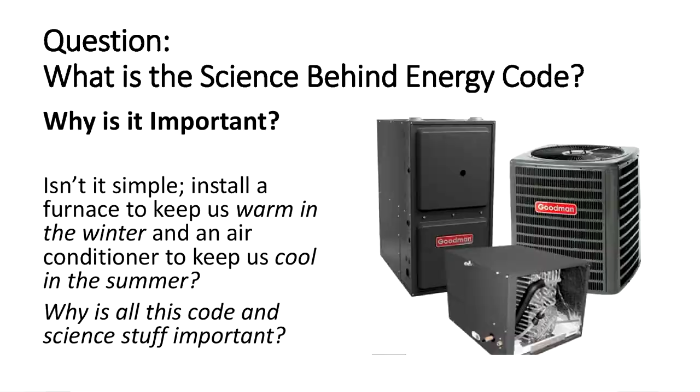Welcome to episode 1, the science behind the Energy Code. What is the science behind the Energy Code? Why is it important? Isn't it simple? Install a furnace to keep us warm in the winter and an air conditioner to keep us cool in the summer. Why is all this code and science stuff important?

Thanks, Katie. Appreciate the opportunity to be here. Why is all this science stuff important? Many of us do think that simply putting in a furnace and an air conditioner, maybe a big one so we're sure it's going to do the job, is all we need to do. But there is a lot of building science that we need to be considering if we want our buildings to be healthy, safe, durable, and a lot of other features, and of course, energy efficient.

So building science, our introduction. Building design, construction, and operation can affect occupants' health, occupant comfort, building energy consumption, building structural durability, and that's a big one.

We've heard lots of instances on the news lately where there have been lawsuits and litigation over water intrusion issues into our buildings, and so that's an important thing to consider.

The building envelope separates conditioned space from unconditioned space. So as we look at this home here, if we consider the garage typically is not conditioned, but the rest of the home is conditioned, any components that separate the conditioned from the unconditioned space is considered a component of the building thermal envelope.

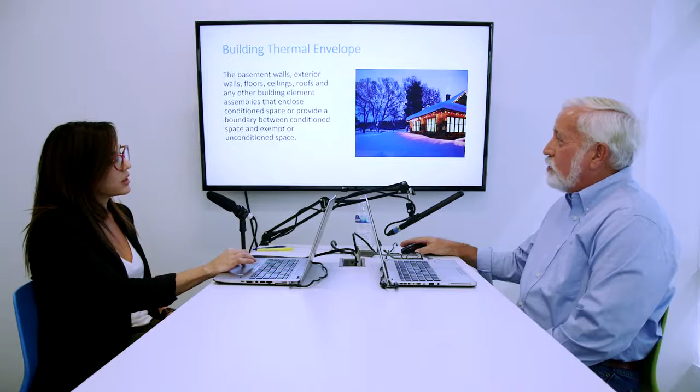The building thermal envelope, let me read this definition and then we'll talk a little bit about your question. The basement walls, exterior walls, floors, ceilings, roofs, and other building element assemblies that enclose conditioned space. So let's talk about that basement. In fact, let's read a little bit further. Or provide a boundary between conditioned space and an exempt or unconditioned space.

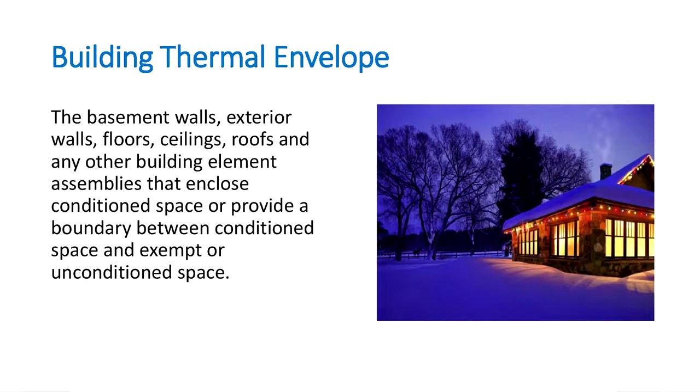So if we have a basement and we insulate the floor above the ceiling of the basement, or the floor of the main floor above, then we're creating an insulated boundary, and so the thermal envelope would be the space above the basement. However, if we insulate the basement walls, then we are creating the boundary down to the basement floor.

And so the basement can be conditioned or unconditioned depending on how we insulate that or where we create that building envelope. Same thing will go for other things like the bonus room over the garage.

The garage is not conditioned. The bonus room is over the garage. We have an insulated floor under the bonus room, or ceiling of the garage, and then all the walls around it. And that brings up a really good point.

That bonus room over the garage is exposed to unconditioned space virtually on all sides except for maybe a connecting hall coming from the rest of the house. So what's it going to be? It's either going to be colder or hotter because it's more exposed to the outdoor condition, where the rest of the house might have just one or two walls exposed and a ceiling.

So that boundary is the thing that we need to be thinking about. And that boundary is a really important thing as we look at the airflow and the moisture flow too, because it's really that separation between conditioned and unconditioned space.

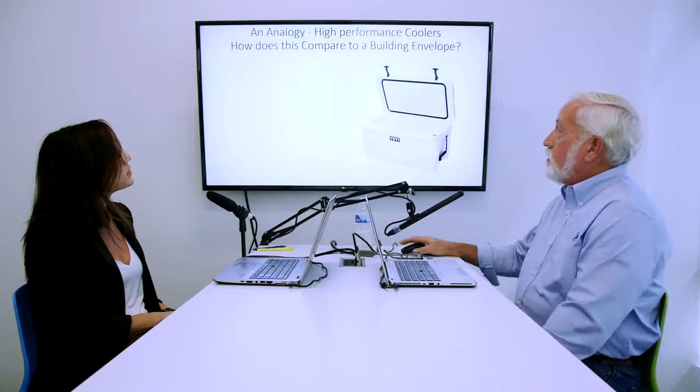So this is an analogy I like to use when we're talking about building energy efficiency. Most of you watching this, and Katie, I imagine you're familiar with these high efficiency coolers, these super expensive, super insulated coolers. They are not cheap.

My wife and I have spent quite a bit of time during this COVID thing taking the trailer up in the canyons above Kamas and doing some camping. About every 2 days, I have to go down and get some more ice because my cheap cooler melts all the ice away and I'm running out of ice. And I'm trying to build up the desire to buy one of these, and I probably will.

But these coolers keep food and drinks cold 5 times longer than standard cheap coolers. So my cooler that keeps stuff cold, keeps the heat out, will go 10 or 11 days rather than 2 days, simply by reducing the amount of heat transfer either into or out of the cooler.

So the cooler will also work if you put warm food in it. It'll keep it warm for a long time. And how does it do it? It does it by increased insulation.

So the walls of this cooler and the lid are better insulated. You'll see that there's a hard plastic shell all the way around, then it has spray foam injected in it. So it's really tightly well insulated with a high R value, much more than we see on my cheap little cooler. So we have less conduction, or we have less heat flow.

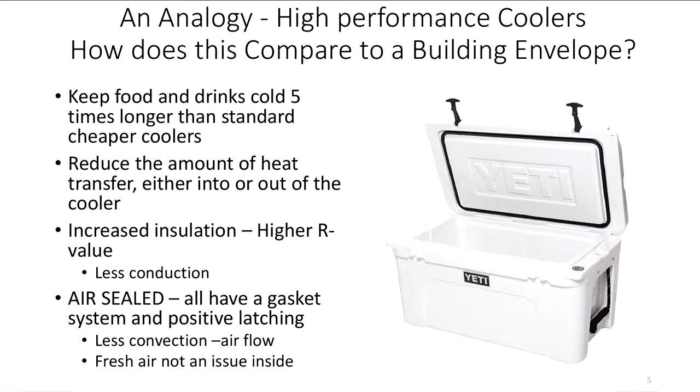The only time you get air in it is when you open the lid, and then you're going to get some warm air in, just like our home. If we have a well-insulated, well-sealed home, we don't get a lot of air transfer in and out unless we're opening a door or a window. And so by having it air sealed, we have less convection or airflow between inside and out.

Now, the problem with a cooler, we couldn't live very well in that type of thing because we wouldn't have any fresh air. So fresh air is not an issue on our Yeti cooler, but the concept of the insulation, the air sealing, we can take and directly apply to our homes and our buildings. So we could talk about, I want to build my structure like a Yeti cooler or a Pelican cooler or whatever brand. They all use the same type of technology, good insulation and air sealing.

So those are two real important factors that we have to consider when we're looking at the building science. And by doing that, we really have a cooler that saves a lot of energy. I'm not having to put so much ice into it.

Now, if I build that super insulated house, am I going to need a furnace? Am I going to need an air conditioner? I get that question quite a bit. If I super insulate my house, do I even need a furnace or air conditioner?

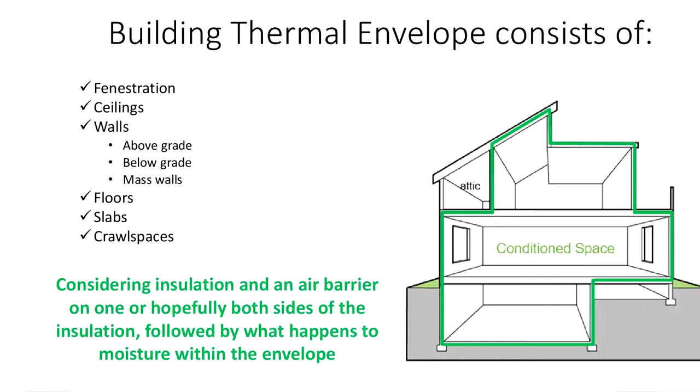So the thermal envelope consists of the following, let's go down through the list. Fenestration -- fenestration is our windows and our doors. It's any opening that we put in our building envelope. So that's what we call fenestration, that's how it's defined. Then our ceilings.

So if we look at this, here's a ceiling area in this house. This is a ceiling area. We have a ceiling area here, and a little ceiling area here. So this is the ceiling for this space, as it is for this space.

Then we look at our walls. We have several types of walls. We have our above grade walls -- so this one, this one, and this one, and this is actually considered a wall too. Here, our below grade walls, our basement walls, so they're below grade. A mass wall would be a concrete wall. We could kind of call our basement walls a mass wall, but if we use concrete all the way up, then we consider it a mass wall above grade.

Our floors -- we have two floors, three floors actually. We have this floor and this floor, but they're not part of a thermal boundary, right? But this floor over here is over an unconditioned space. And this floor is over the ground. Now it's not as cold as outside, but it's still a floor that's not inside the thermal envelope.

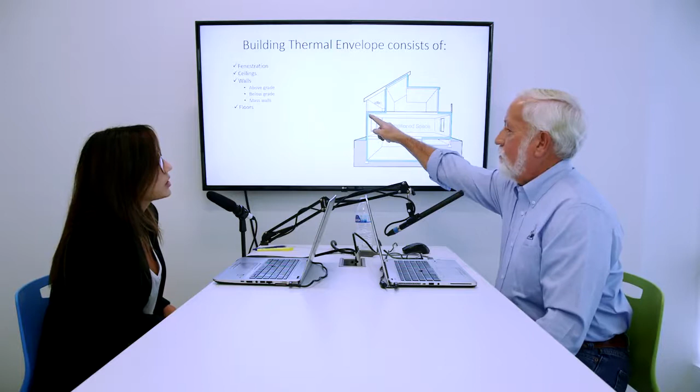Actually, I don't like the way that I have it described here. I would prefer that we insulate down here, which means this space is inside the thermal envelope. Why would you do it that way? Because every time we put in corners and such, we impact how we need to seal the insulation, and we're going to get into this a little bit deeper as we move on.

But insulation, the typical insulation we use in our homes is a fiberglass batt or a blown fiberglass material. So if we have fiberglass batt right here creating that thermal boundary, then we have to put a block in here and somehow seal that space. If we don't, then air has the ability to move back and forth, and if we move air through insulation, we lose our R-value.

Same thing, a big point on this one: we like to see insulation -- fiberglass insulation, or cellulose, anything that relies on air within the insulation for some of its value -- enclosed on all 6 sides. What I mean by all 6 sides is if we insulate this wall, it's going to be enclosed on the face of the drywall, enclosed by the bottom plate of the wall, and then there's another plate on top that'll enclose it, and the 2 studs on either side, so we enclose it there.

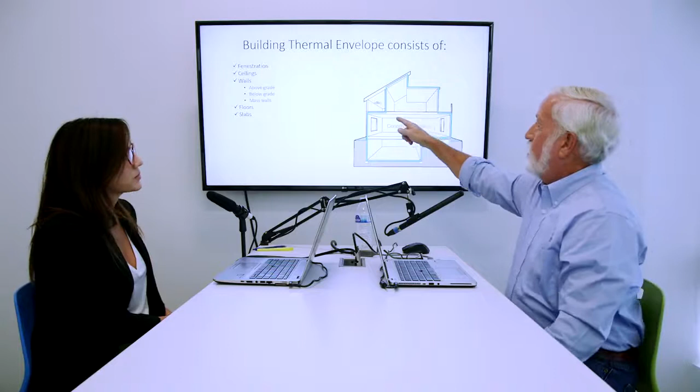So as air rises, what's going to happen? Other air has to come in. So we actually get a convective flow where air will flow up and around within the insulation that's in that wall cavity. And when it flows up and pulls in air from the attic, what is it? It's cold air. And so we destroy some of the R value of the insulation by having air convecting up and down through it.

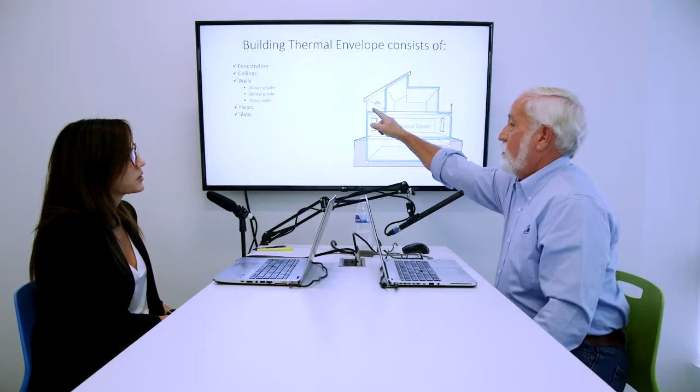So what the code wants us to do, and what building science tells us to do, is to put an air barrier or something on the back side of that knee wall so that we enclose the insulation on all 6 sides so we don't have any airflow. So if we insulate here and here, we would need to cover the insulation there. We need to cover the insulation there, but we eliminate this area here. This gives us, actually, you could put cabinet fronts here and use that for storage space and not create a void in that thermal envelope.

So you could put ductwork in there. The ductwork's not outside the envelope. You could do lots of things that make it a better application, and you don't have to do all this blocking and stuff in other places.

Now, when we get down to the crawl space, we can do the same thing. We can come down and put a good vapor barrier on the ground. The code's not going to worry about the ground because it's not cold. It's 55 degrees, like we said, but they'll require this to be insulated. The issue with crawl spaces, though, conditioned crawl spaces, is we have moisture coming up out of the ground. That makes sense, and that's an issue.

So you need a real good vapor barrier on the ground to stop the moisture coming up. Otherwise, you end up with that excess moisture in your house, and then we have lots of problems when we get excess mold and everything else. And I actually have a picture of mold from a crawl space. So we'll see that, and it's that very issue. So I'm not real excited about conditioned crawl spaces, but I am about conditioned attics if they're done correctly.

So let's just finish going down through our list there. We have the floors, our slab floor. We have our crawl space. Considering insulation and an air barrier on one or hopefully both sides of the insulation, followed by what happens to moisture within the envelope. So two things that we're looking at on this envelope that are big things: the insulation, the air barrier, and then the moisture. We just talked about what happens on the moisture here.

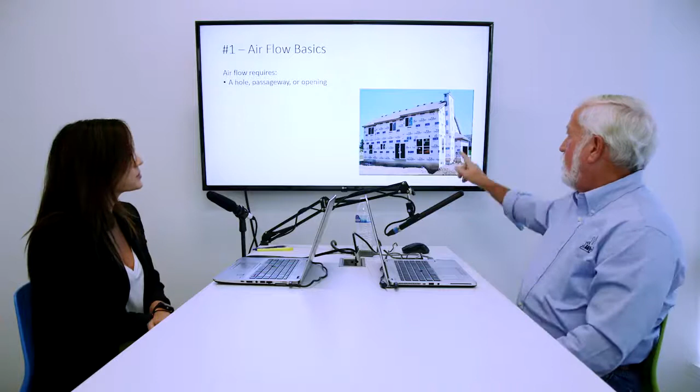As we look at this picture, this has building paper on it. It might not be easy to see, but in some places they've taped the seams, trying to make that air barrier really tight so that we don't have air leaking through there. They have a little spot they need to finish here, but pay attention to this little thing, because we're going to talk about it later—see this fireplace coming down? Yeah, it's opened kind of at the base, opened underneath. We're going to talk about those a little further on.

So by putting this paper on, what have they tried to do? They've tried to cover the holes rather than going around and sealing every little tiny hole, because you have minute holes between the seams in the plywood, cracks and joints. We're going to have holes where air can get through just because the framing members aren't perfectly tight to each other—there's air spaces. The building paper is a good method: you wrap it, seal it up with tape, and you've patched all those little holes behind there without having to individually seal those holes. Yeah, that would be very tedious.

So to have airflow again through there, we have to have a hole. Then the second thing, we have to have a force to push the air or pull the air through that hole. If we have no breeze, if we have nothing else that creates a pressure difference, then really we don't have airflow, because you have to have a pressure difference before you have airflow. But we'll find that it's really easy to create a pressure difference, and we'll see that as we move on a little further.

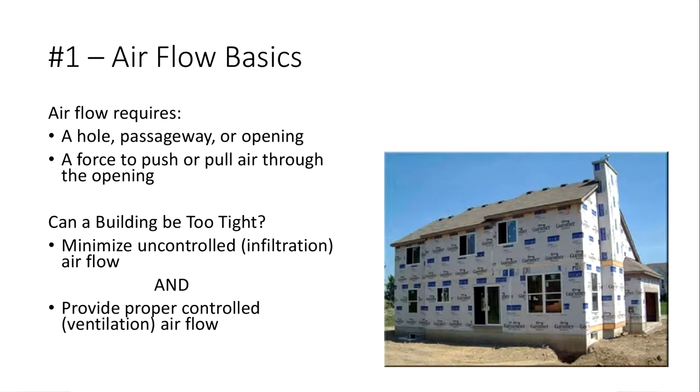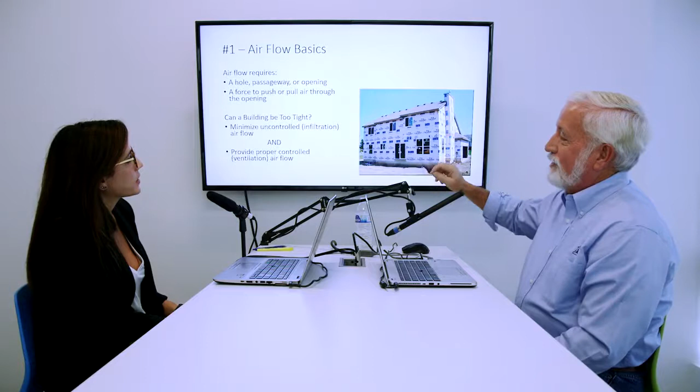So we're going to talk quite a bit more about these two terms. Infiltration is the uncontrolled movement of air through the envelope. Ventilation is the controlled movement of air into the building. So we don't want infiltration and we want ventilation. That's exactly right. And why is that? Because we can control it.

Now, what happens with infiltration? We talked this morning about the windstorms we had a couple weeks ago. When you have a building that leaks a little bit, when you double, triple, quadruple, or even increase the wind ten times what normal wind is, you increase the infiltration by the same factors. So the wind will just blow right through houses. Fortunately it wasn't really cold, but I imagine some people's houses got hot because during the warm days, so much warm air was coming in that the air conditioner probably struggled keeping up. That's true, so wind is a big factor. We're not going to talk about blower door testing today, but we blower door test buildings to see if they're airtight—what we're doing is simulating having wind on all sides of the building.

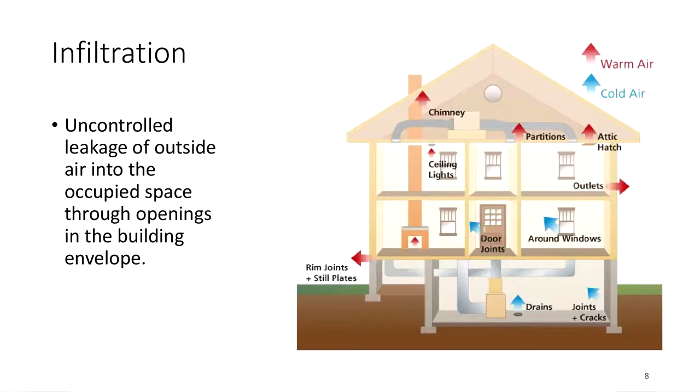So infiltration, let's talk about this for a couple of these slides. It's the uncontrolled leakage of outside air into the occupied space through openings in the building envelope. We'll just call them holes in the building envelope. And this shows a few of them.

We have electrical outlets. I don't know if you've ever experienced it in the wintertime when the wind's blowing, you can go over to plug something in and you actually feel cold air coming through your electrical outlet. I've definitely felt a draft from windows because we have old houses on the East Coast and windows get very drafty. And they like to preserve the old windows because they're historic, and they do get drafty.

And in fact, some of the drafts you get off old windows isn't even air leaking through them. We'll talk about that further, because if you have a big window that gets really cold outside and it's single glass, what's going to happen to the air touching the window on the inside? It's going to get cold, so it's going to fall. And so that convective flow we talked about with insulation, we get the same type of convective flow against a poor window because the cold air drops, and as it drops it pulls air from above down through it, and you get this flow against the window.

And if you're sitting there, what are you going to feel? You're going to feel very uncomfortable because you got a cold draft. And the window could be perfectly caulked and sealed, and you're still going to have that drafty feeling. It's because we got air movement created by temperature difference, not air leaking through the envelope. But both of them are uncomfortable.

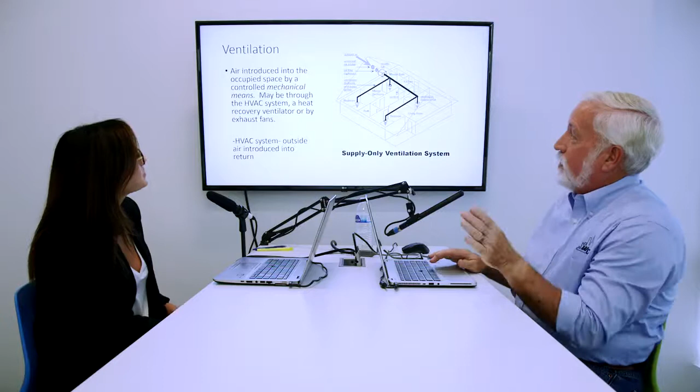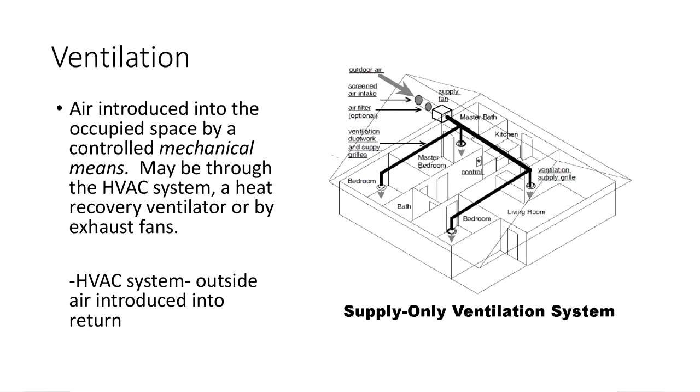So we've talked about infiltration, and now ventilation is when we introduce some air into the occupied space by mechanical means. That means we have some type of fan that brings outside air in, or we can do it with exhaust fans, or with heat recovery ventilators. There's a number of methods. This one is what we call a supply-only ventilation system, where we bring in some outside air through a fan. We filter it and screen it so bugs and rodents don't get in, and then discharge a little fresh air into the rest of the building.

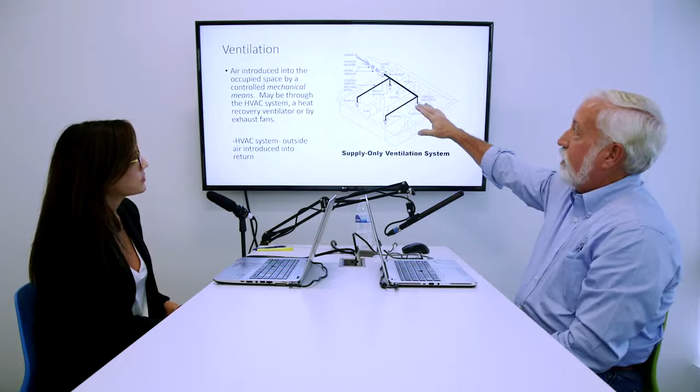This can actually be done by hooking into your HVAC system, so when that runs, we pull a little bit of outside air. When we have a supply-only system like that, how do we exhaust air out of the building? What happens is we pressurize the building by bringing outside air in, and so however much we pull in leaks back out through all the holes we talked about.

This is just one of the ways that we can ventilate. We're not going to spend a lot of time on different types of ventilation systems, but there are 4 or 5 options with some hybrid mixes of those together. That'll probably be another topic we discuss sometime. But let's just remember that ventilation means we're controlling how much outside air we bring in.

So are you saying infiltration is bad and ventilation is good? Isn't energy consumed to offset infiltration air the same as for ventilation air?

Great question, and I've had this discussion and some arguments with people over it. Why am I making a house tight if I have to bring in some outside air? Why don't I just let it leak so we get fresh air that way? The question really is, we can control how much ventilation air we bring in, but we can't control the infiltration. The infiltration will change depending on the wind, depending on the temperature outside and inside. It changes—there are just a lot of factors that impact it.

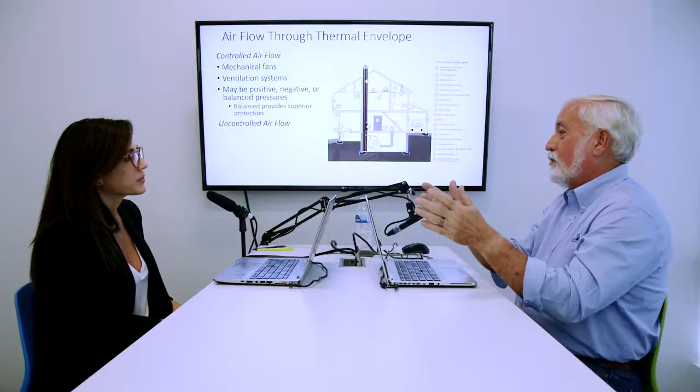And then we have neutral pressures, and we're not pushing moisture into walls or sucking moisture from outside into our walls. We're trying to minimize or eliminate that moisture into our wall cavities. Balance provides superior protection by far.

And then we have our uncontrolled airflow, repeating some of these things a bit. Those are things that are not part of the building design. We don't design a building and say, I want to have 4 square feet of holes in the space so that we make sure we leak plenty. We don't plan on uncontrolled holes in the building.

And that's what they are. They're leaks or holes in the buildings, or leaks in the HVAC ducts. If we created our thermal envelope and had duct systems leaking, it's leaking outside the thermal envelope, so it could either exhaust air out of the space or suck in outside or unconditioned air into the space. So we can positive or negative pressure the house through leaky duct systems.

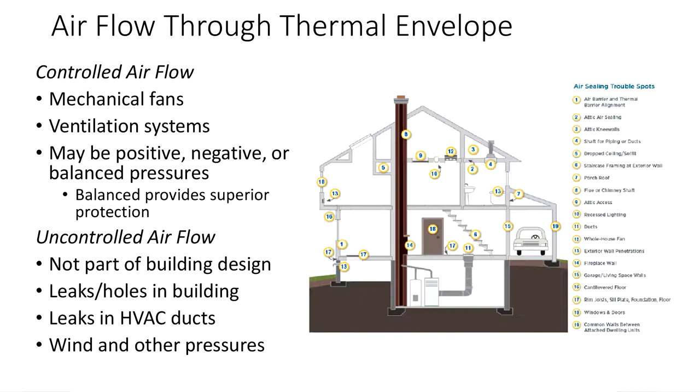And then winds and other pressures that we'll discuss a little bit. Are some of these leakage spots more cause for concern than others? What would be the main focus?

There are some that really are a concern. And the first one I want to point out, number 15, is the wall between the garage and the living space.

Now, I don't know if you've heard this on the news, but I pay attention to these types of things. With one of the hurricanes we had a month or two ago, I can't remember which one it was, but they said they had about 80 deaths, and about half of the deaths were from improper operation of generators. They had no power, so people were running generators. And people lots of times will put a generator in a garage so they don't have to hear it, and so it doesn't get stolen or whatever. Yeah. And of course, you don't want it in the house, because it'll kill you if it's in the house.

If the generator is in the garage and we have a leaky wall between the garage and the house, we can get carbon monoxide off the generator into the house. People have died running generators in their garages. The same thing happens with charcoal grills in the wintertime, people bring them into the garage and open the door a little, but carbon monoxide levels build up. If the house is negative pressure, whether from a fan running or stack effect, and it's not sealed, we draw those products of combustion, the carbon monoxide, into the house. Families have died from charcoal grills and generators in garages, so that's a big one.

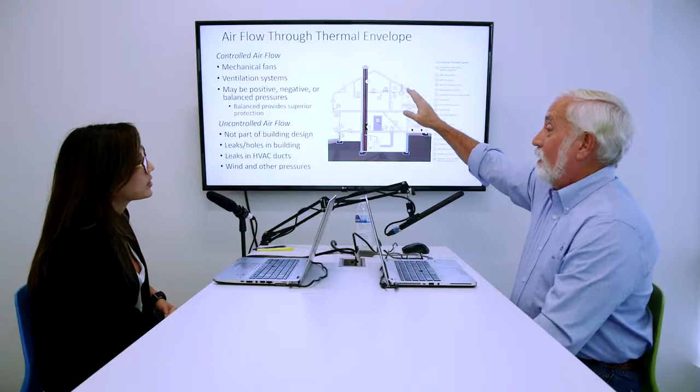Another important one is fireplaces, a big hole right through our house. I've been on thousands of roofs in my career, and if you walk over to a masonry chimney and lean over the fireplace, you can feel air drafting out of it. People don't realize there's a damper in there, but it doesn't close tight, or they don't close it when not in use. So warm air from the house is always drafting up that chimney to the outside, which takes the house negative, which means it could draw air from someplace else, exhausting air from inside the house without any mechanical means. It's just warm air rising, and that's a big one.

And then we have concerns with gas appliances if those aren't properly vented. They can vent into that chimney or vent through another vent. So those are three big ones you need to worry about: the chimneys, the fireplaces, the vents off the furnaces, and the walls between garages and the house.

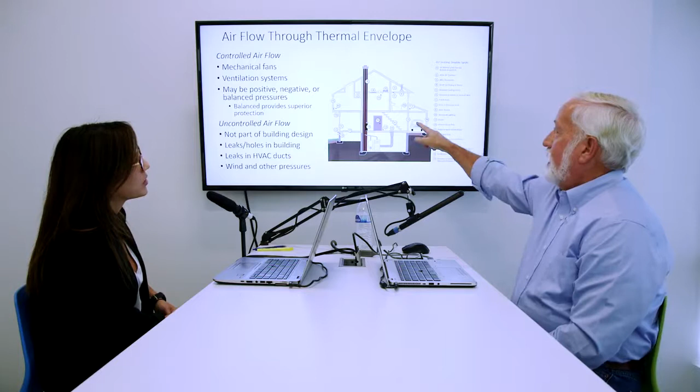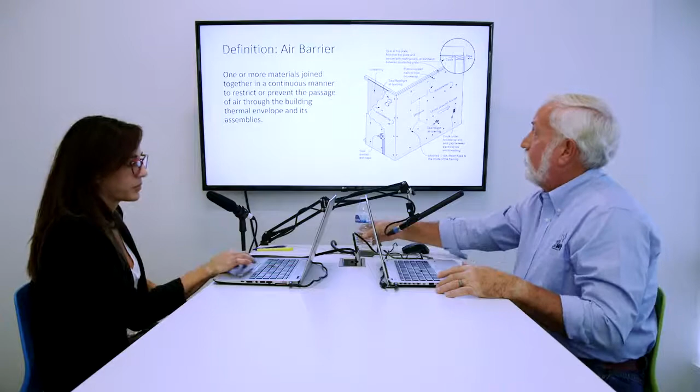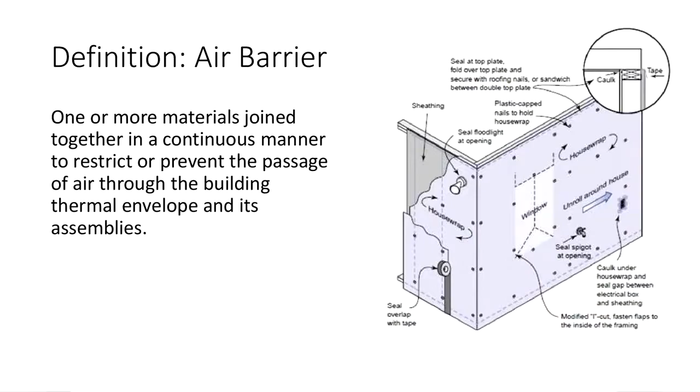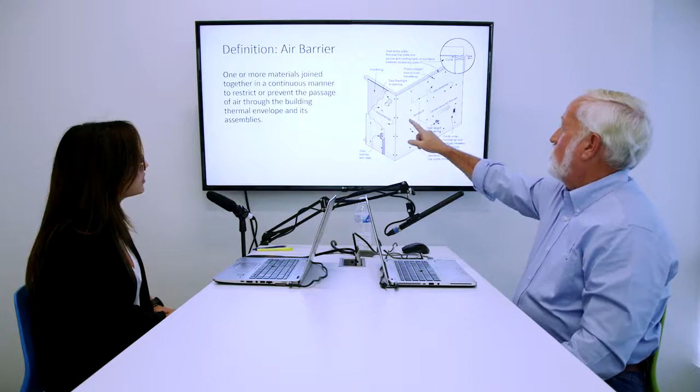So let's define air barriers or building papers. It's a material that we join together in a continuous manner, and we can see it on this graphic. They nail and staple it, cover everything, and then tape the seams and seal around the penetrations. You've got a hose bib coming out, an electrical box, a floodlight. You make sure you seal all those things and tape them, and that's how we seal that thermal envelope.

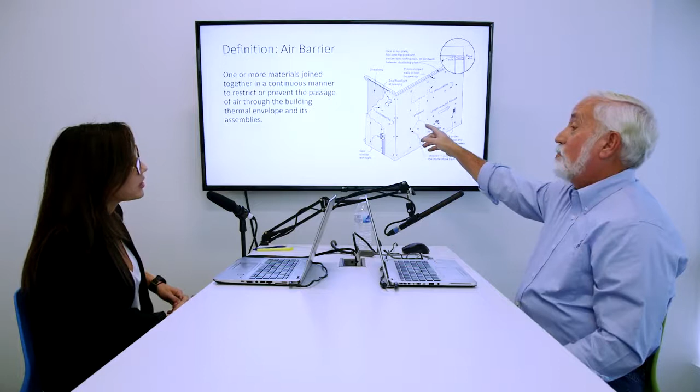Does the air barrier stop rainwater? That's a good question, because sometimes we call it house wrap, and it does stop rainwater. Any rainwater that gets through will run down it. But it is not a vapor barrier, so plastic sheeting is not something we'd want to put there. People say, isn't plastic sheeting a really good air barrier? Won't it stop any air from coming through? Sure, it'll stop the air.

But what does plastic also do? It stops vapor from being able to move through it. So these papers stop the rainwater, they shed it, and it just runs down. It's kind of like a rain jacket, not a rubberized one, more like a windbreaker type rain jacket, or like Gore-Tex. It sheds the rain, but if you sweat, it breathes enough that the moisture can dry away from your body, and that's the type of material we want.

Because if we put a vapor barrier on the outside in our cold climate zone, and moisture coming from inside strikes that vapor barrier, it's going to see cold plastic, and what happens? It condenses. You'd have moisture on the backside, and moisture will destroy your building. We get into the mold issue again. So our air barriers need to have a perm rating so that any moisture on the inside has the ability to move through, giving us the ability to do some drying.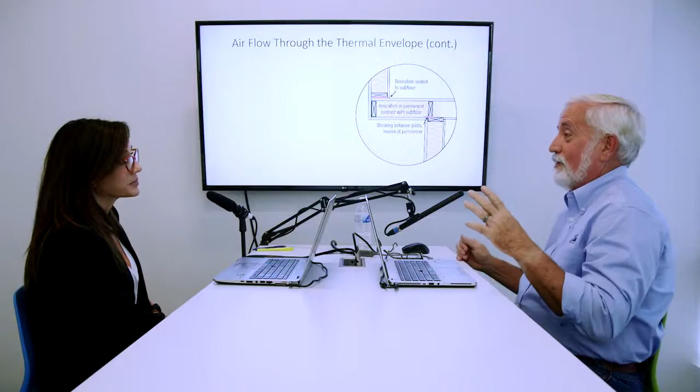Back 40-something years ago, when I first started doing HVAC, we built pretty simple houses. They were little squares or rectangular shapes. What do we see now? You go by townhouse projects or apartments or new houses, and what do they have? They have a bay sticking out here and a cantilever here, lots of angles and everything. They're not plain and straight. We have lots of this type of stuff occurring, kind of like that first picture we showed where the insulation goes up around that little attic space.

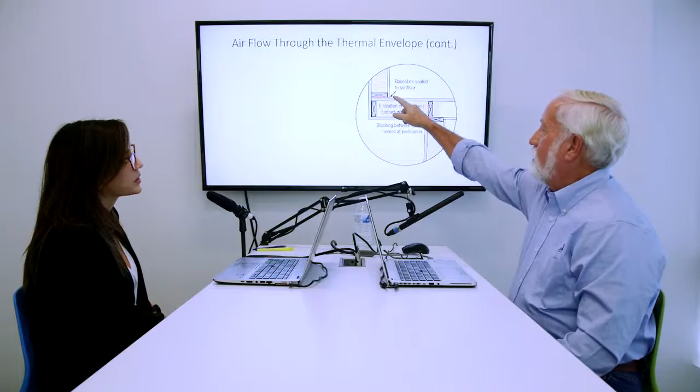Every time we make any of these turns and stuff, we have areas that we might need to seal. So sealing the thermal envelope, if we're not putting that building paper on, or we're not comfortable that it's going to seal it properly, we have lots of other places we need to seal. And it's not really expensive on some of these, because before we put the wall on, we can put something down for a sealer. When we put this block in, we can seal the block when we put it in. So some of it's just a process change. A framer who understands these principles can do a great job eliminating air leakage just by changing his habits or practices a little bit.

So many little holes equal a large single hole. I don't know if you've ever seen him, but we've had him come into Utah a number of times, Mark LaLiberte and some of the other gentlemen from Construction Instruction. They come in and give really great talks on building science and how we can build a home that's tight.

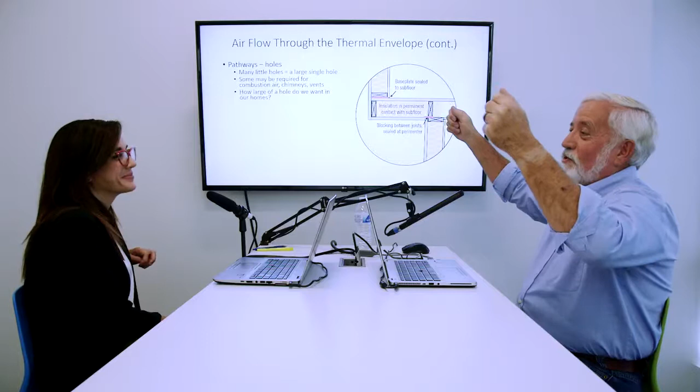I love what Mark does in every class. He takes a big piece of paper off the easel where he's writing things, folds it in half, and says, do you want a hole this big in your house? No one wants a hole that big in their house, leaking air through it. Then he talks about how all those little holes in your house add up to a hole this big, and we can verify that through blower door testing. If we do the proper air sealing, the better we seal, the tighter we go, he folds the paper up and says, well, maybe you only want a hole this big. Theoretically, we don't want a hole at all. We don't want any holes.

Now, to not have any holes is literally going to take cooler-type construction, and it's really going to be expensive and hard to do. But there's some technologies out there - insulated concrete forms, ICFs, the big foam blocks that look like Legos. You stack them all up, then pour them full of concrete. They don't leak air at all. Foam and concrete this thick isn't going to leak any air. The only place you're going to leak is around your windows, doors, and ceiling. So they make really tight houses that you have to ventilate.

So that's a great question - how large a hole do we really want in our house? How large a hole do we want to have that we have to pay extra money to heat and cool our house because we basically have an open window all the time? Now, some holes may be required for combustion air, chimneys, and vents, but we can actually get around those if we want to do the right things. We'll talk a little bit more about that.

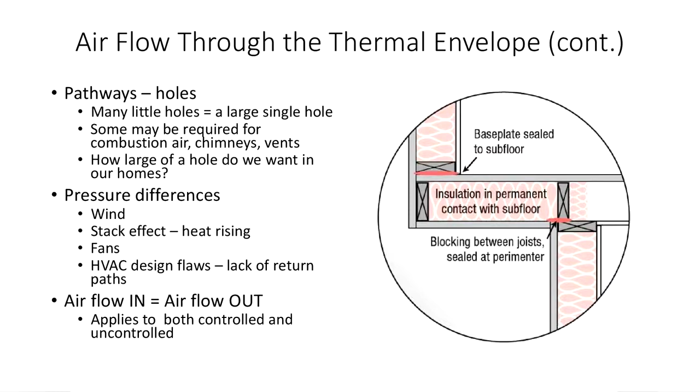Just want to reiterate this one: if we leak some air out, if we exhaust some air out of the building, we're going to have air come in to replace it. If we have air come in from outside, whether it's through the wind or a positive pressure fan that sucks air from outside and dumps it into the space, we're going to have to leak a certain amount out. We don't create air inside the space - it's always going to strive for a balance. Air in equals air out, and it applies to both controlled and uncontrolled, whether it's infiltration or ventilation. If you bring a certain amount in, it has to leak out. Now, when we get into big buildings, large commercial buildings, they're bringing in so much outside air to maintain air quality in the whole building, like a building we're in right now.

And so they are pulling it in with their HVAC system, and then they have big power exhaust fans that remove it, because we can't rely on it leaking out of the building since we have so much interior space that doesn't see an outside wall. Yeah, it'd be stale and stagnant in the middle part of the building.

So we have to mechanically make sure we have that controlled ventilation done according to engineering principles. Okay, the next one, let's talk a little bit about building too tight and vapor barriers.

I remember it real well because you have events that happen in your life, whether it's work or someplace else, where something crazy happens, and you remember that event. Back in the 70s, 76, 77, when we were talking about the energy crisis, one of the things that came out of there was we need to build a tighter building.

Someone came up with the idea that we normally put VisQueen vapor barrier on the warm inside surface of a wall here in Utah. If this was an outside wall, we'd put a vapor barrier behind the sheetrock so we don't get the vapor, the moisture, into the wall cavity. If done correctly, they work well.

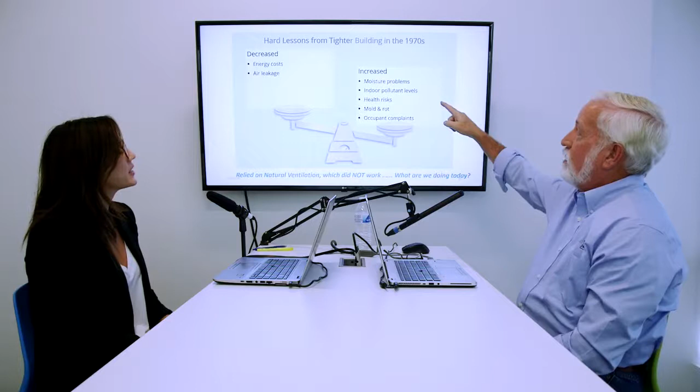And so that was short-lived—no more vapor barriers on the ceilings. Those were some of the hard lessons they learned. It did decrease energy cost and decrease air leakage, but it drastically increased moisture problems and indoor pollution levels. We have health risks, mold, rot, and occupant complaints. So it did not work.

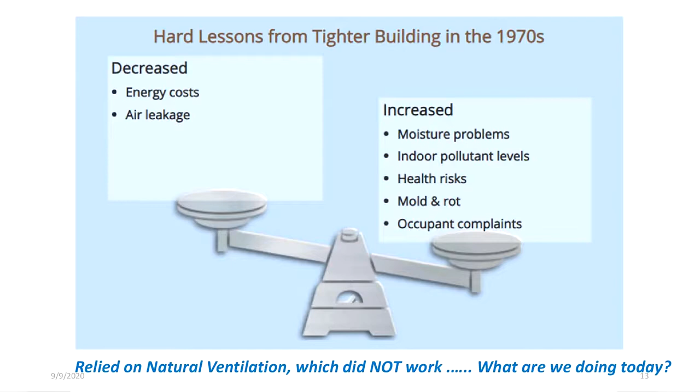And the big problem was, if we look at the bottom, they relied on natural ventilation, which did not work, and which doesn't work today either. Now the question is, what's natural ventilation? Natural ventilation is we crack the windows, we crack a door.

It's not going to work very well. People don't want to open their windows in the summer, and they don't want to open them in the winter either, especially with the fires going on and the smoke we'd bring in from outside. Our code still allows natural ventilation, and we're still doing it today in some cases, but it really needs to disappear from the code because natural ventilation doesn't fit with the other things we're doing to the building envelope. We really need mechanical ventilation.

Yeah, it seems quite counterintuitive. Well...

I'm not pointing fingers, but we have amendments to our state energy code. If we didn't have those amendments, the way the code is written, every residential home or apartment up to 3 stories would be blower door tested, and every test would have to reach a level of 3 air changes at 50 pascals or lower. This is amended out, so you don't have to do it, you can. But if we followed the code exactly, we'd test everything to a level of 3 or lower, and there's a trigger that says if you're tighter than 5 air changes, you have to mechanically ventilate - you cannot use natural ventilation.

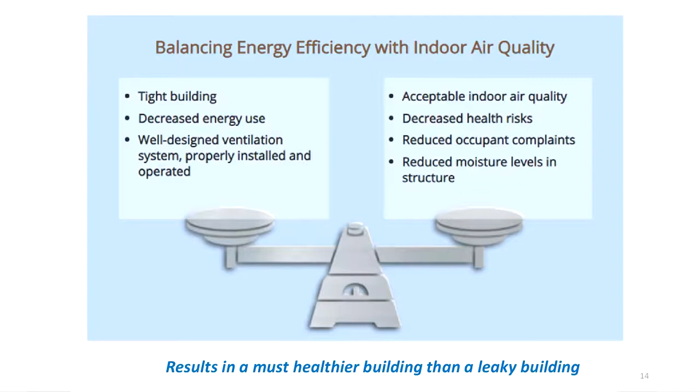A balancing of energy efficiency with indoor air quality is what we want to strive for. We want to build a tight building - and I'll repeat, I don't think you can build a building too tight if you do the right things, with a well-designed ventilation system so we can provide acceptable indoor air quality, reduce occupant complaints, and reduce moisture levels. So we can build a tight building, drastically decrease energy use, provide a well-designed ventilation system that's properly installed, balanced, and operated, and the result is a much healthier building than a leaky building.

Going back to that question, why don't we just have a leaky building? Well, we're still not going to ventilate the whole entire building. We might just ventilate around the perimeter, but we're not going to get fresh air out of the center of the building, or to the center of the building.

So, improper airflow - what are the effects on occupants? We've talked about some of these already: pollutants, mold growth, radon, smoke, CO2, VOCs, cleaning chemicals.

Moisture and mold because of poor humidity control, condensation. It's really a simple thing when we talk about condensation. Why do we get dew on the lawn in the summertime? Because we hit the right temperature that drops the moisture out. When I got this out of the fridge, what do we get on it? A little bit of moisture. If you come from the East Coast, you know that if you set a drink with ice in it down, it sweats and pours water. So depending on humidity and temperature, we get condensation - what we call the dew point. It varies depending on how much moisture is present and what the temperature is. We can get condensation at different times of the year, even in summertime, in our air conditioning ducts and things like that.

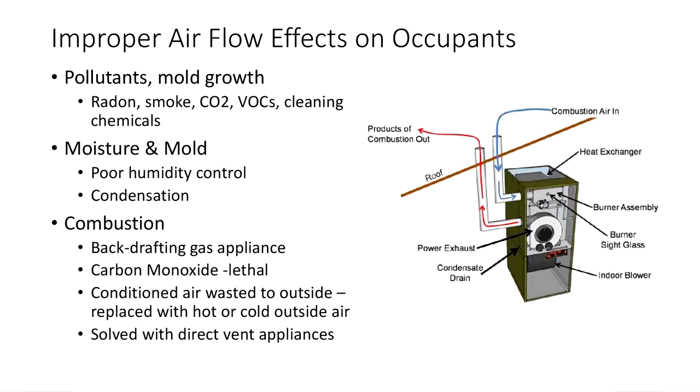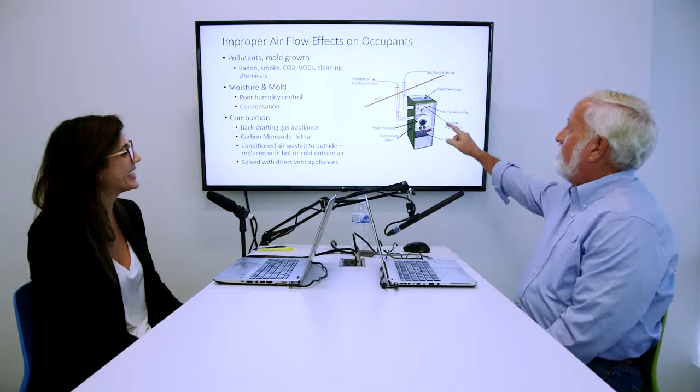Sure. I threw in this slide because I get this question a lot. This is a direct vent furnace. If we look at this furnace, here's our blower compartment. When this is installed, we bring return in the side or the bottom, and we have our supply going out. We have this heat exchanger in here, and you'll notice the burners are inside this little box, labeled burner sight glass.

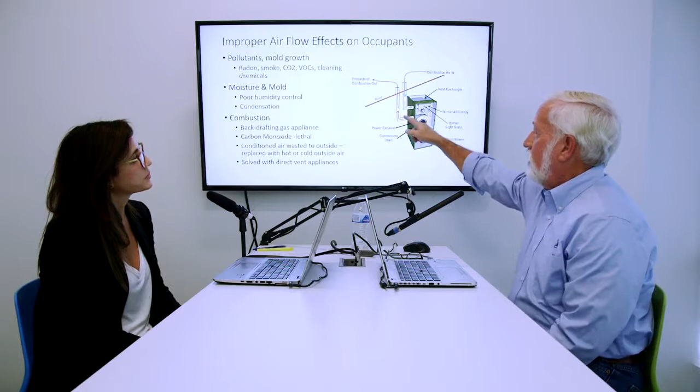And then we have a fan that actually pulls the products of combustion. The flame is pulled into this heat exchanger. The airflow across it pulls the heat off, uses it to heat the space, and then this fan exhausts outside. So this is what we call a direct vent appliance. It brings combustion air directly from outside in a sealed pipe into the burner compartment, goes through the furnace, and then back outside. Nowhere does the flame in this furnace see the indoor environment.

Now, a non-direct vent furnace will use open combustion. You won't have a burner enclosed in a little sealed box. Typically down in here you have burners, and you can actually see them. You pull the door off, and you can literally see the flame right there. And it's drawing air from inside the space. It rolls up through the furnace, and then exhausts out a metal pipe that goes up through a chimney or a vent. It relies on the heat in the products of combustion to carry it out, just like a fireplace. So that is a non-direct vent appliance.

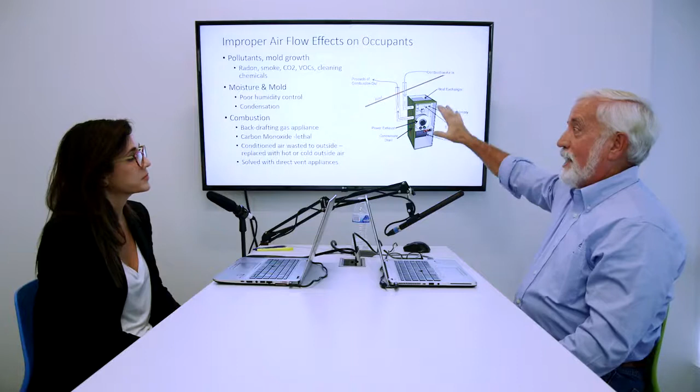Water heaters are the same way. I don't know if you've paid attention to a water heater, but they have a little cone on top with a vent pipe coming off of it. That cone draws air from inside your space, the burner draws air from inside your space. So if something were to go wrong, or if the building were to go really heavily negative pressure because someone messed something up, you can actually draw products of combustion into your space.

And when that happens, people get sick and people die. We hear about carbon monoxide deaths every so often, and a lot of times they're tied with vent systems. So a direct vent appliance is the way to go. It eliminates drawing air out of the space for the combustion process, and it eliminates the risk of exhaust fans reversing the vent and drawing in the products of combustion. So it solves a lot of issues, and it's really the best way to go.

They've been out since the early '80s, so they're pretty good appliances, and there's no reason not to put one in other than they cost a little bit more. But they do offset some of the things we have to worry about, the improper effects of that airflow through the envelope on the occupants. So I just threw this one in so we understand a little bit better.

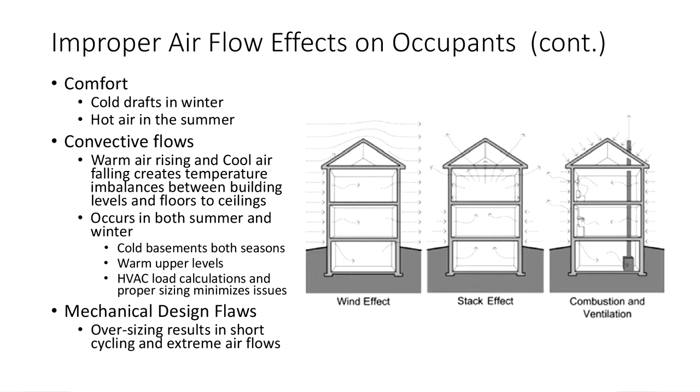So what does this improper airflow do? We've talked about these already. With wind, we see what happens: we blow against one side of the building and some air is going to leak in, right? So what's going to happen? It's going to push air out the other side.

Or there's stack effect, because we're warming this air, it tends to rise between levels. If you take a magnehelic, a low pressure gauge, you can actually measure the pressure difference between the lower level and the upper level. This will be positive pressure and this will be negative pressure. So it draws air in from the lower levels of the building. It's not going to draw too much through the dirt, but it'll draw right at this level. And then by the time you get up to the upper level, we're all positive pressure, and we're leaking out. That's the stack effect, the same thing that makes a chimney work.

And then we have combustion and ventilation. So we can have fans and dryers, range hoods, and all those things that suck air or exhaust air out of our space. A gas appliance that's burning and sucking air out of space because it needs air to burn, right? It needs oxygen to burn. And then that goes up.

Back in the 80s, and I keep going back because I experienced all these things, the gas company came around and the building inspectors said, do you know what, we're burning air out of the space. We call it combustion air that's used for heat production in the furnace.

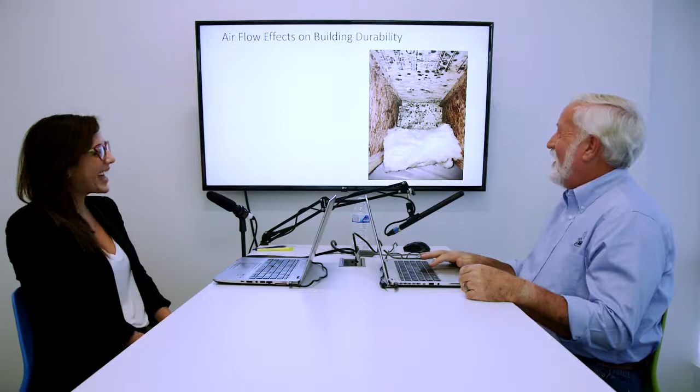Oh, here's my mold picture. Here's your mold picture. Isn't that great? That's actually kind of gross, isn't it? It is nasty. When I went out to investigate this, I got a call from a guy.

He says, can you come take a look at this and tell me what's happening here? I got up there, and this is the insulation that lays up against the rim joist, on the outside of the building of a home. And I pulled this insulation down, and I went, ooh, where's my mask? You know what I mean? Because see it out here?

It's spread, it's everywhere. There was so much moisture, but why was there so much over here? Because it's colder there. That's outside on the other side, so that's colder, and that's why we had so much more moisture there.

And it just goes right back to the thing we were just talking about. If we have, for some reason, airflows that are moving that moist air that direction, then we greatly increase the amount and the likelihood of mold growth.

So airflow can transport moisture into ceilings, walls, and other framing cavities. Moist air contacting a cold surface may create condensation. Just depends on the conditions. Obviously, the conditions were right here. And how did this get fixed?

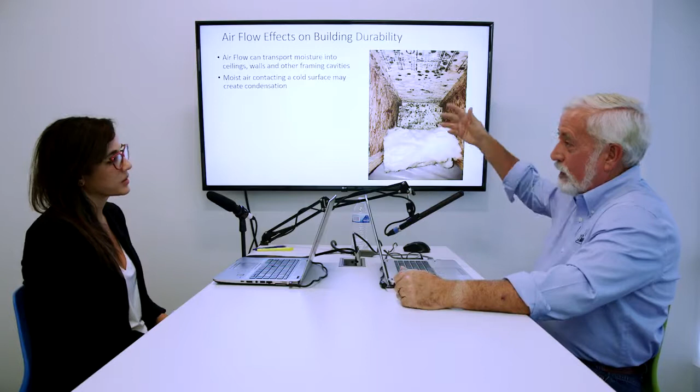So what he had to do was come in and put a whole new vapor barrier. They ran it up the wall, glued and sealed it to the wall, and insulated the wall real good. They had to bring a guy in, and they used dry ice to kill the mold, sandblasting it with dry ice particles, because after it's blasted, it just disappears since it's just carbon dioxide. And so they blasted it all.

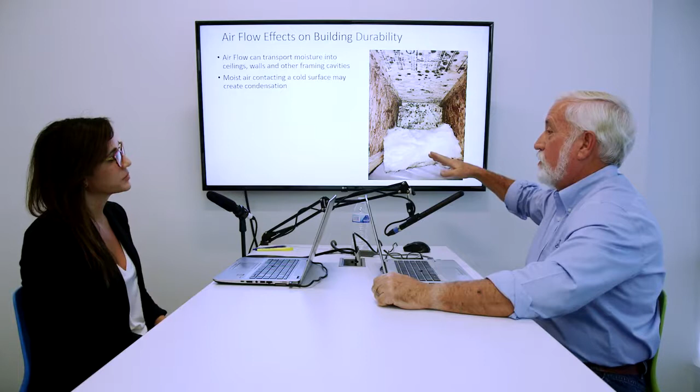And then I told him, what you need to do is spray foam on the rim joists. Because even if you have it all cleaned up and you put a piece of fiberglass back up and get a little bit of moisture in there, what's the moisture going to do? It's going to migrate through the fiberglass insulation, because fiberglass doesn't stop moisture. So one of the things on the checklist in the code says you have to have an air barrier on your insulation in the rim joists. And a lot of people don't do it, and this is the problem that happens.

So spray closed cell foam, a couple inches of that. What does it do? You put that spray foam on, outside surface here, inside surface here, the moisture hits the inside surface, but it's warm, because we have all this insulation stopping the heat flow to outside. This surface is cold. With the insulation up there, we still have air movement through it because we don't have an air barrier. It's not enclosed on all six sides, so the moisture still gets through, and we're going to have mold.

So hopefully he sprayed foam. I didn't see it after, but that's the direction I gave him. Or he'll be doing it again, because it's almost impossible to have that perfect seal on that vapor barrier on the ground—someone crawls across it and pokes a hole in it, and then the moisture's coming through. So it's building science, and it's something we've learned through mistakes.

It's surprising too, because Utah's so dry, to see a mold issue in a Utah home. But like you said, that's such a great point. I go to code hearings where the codes are developed, and I've been on some ACCA committees where we talk about load calculations, duct designs, and everything. Everybody keeps telling me, you don't have moisture issues. And no, we don't have moisture issues like those people do.

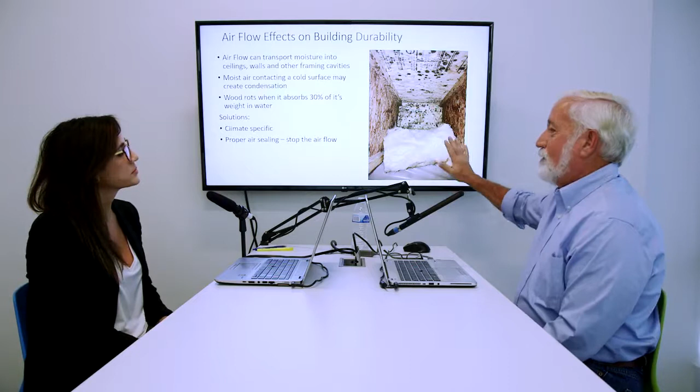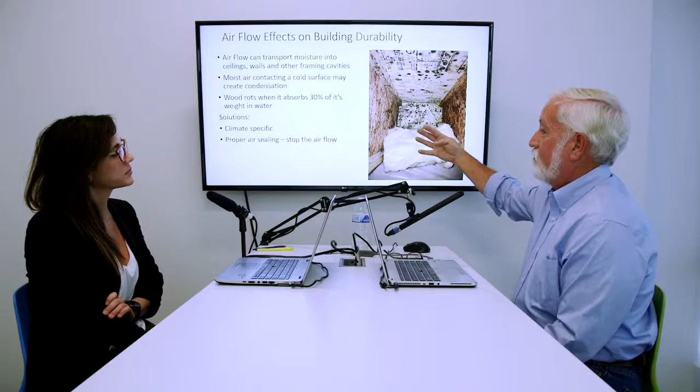This insulation looks like it's bigger than it really is. This is just a piece of insulation. If you stood it up, it's this depth, so it's just against there. But it isn't air sealed. It's got that side, this side, nothing on the bottom, and nothing on the face. So it only has 4 of the 6 sides sealed.

What's going to happen is air is going to come up through or drop down through, because it's against that cold surface. It'll drop down through the crawl space and just circulate around, and we get moisture due to the convective flow through the insulation. The insulation is almost useless at that point, and we even have colder temperatures because the insulation's wet.

Mechanical ventilation is one of the things we have to do, and we have to do it correctly. Insulate to minimize cold surfaces, and then add CI. CI stands for continuous insulation.

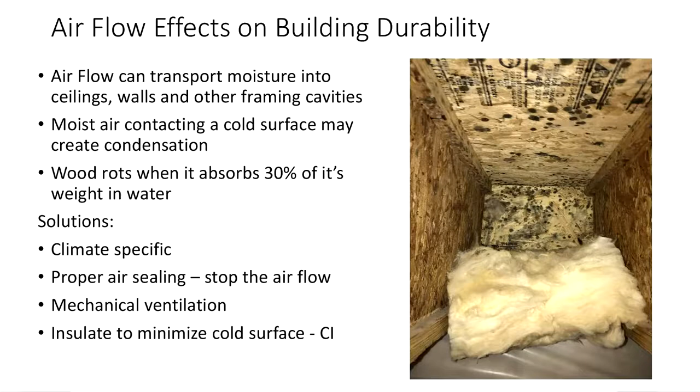This could have been solved if they had put continuous foam board on the outside of the building. Now it's a little more expensive, but you might have seen buildings where they put pink or blue foam or white foam on the whole exterior and then put the stucco over it. That gives you some continuous insulation.

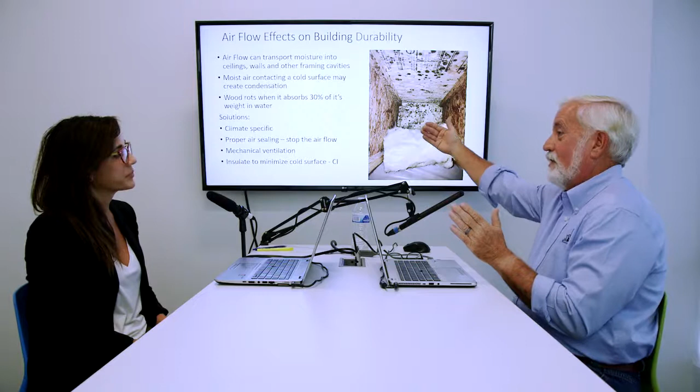And if it was on the outside, on the other side of that board, what does it do? It keeps this surface warmer, and then it doesn't condense, because we've insulated it. So it's similar to spraying the foam, but even better because it's on the outside and it's continuous insulation.

I think this is a great slide, one of my favorites, because it really tells the story. We can have fleece or a sweater or a sweatshirt, and it keeps us warm until we have a little breeze. And then what are we? We're cold.

And all we have to do is just throw a windbreaker on, an air barrier, and how much warmer are we? A lot warmer. Solves a lot of problems.

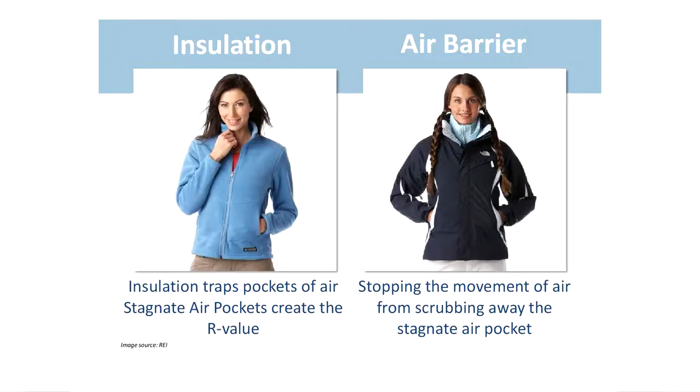It's the exact same thing with our insulation. If we don't have the air barrier, the air just moves through the insulation. Like a down jacket - if it doesn't have Gore-Tex or something on it, it's not going to do anything. The insulation traps pockets of air, and those stagnant air pockets create an R value. But as soon as we have air moving through it, we lose the R value, and it doesn't work anymore as insulation.

So if we stop that movement of scrubbing away those air pockets, it works. That's why we say all the time, put on your layers - we create those air spaces, and then put on your last layer, something that will break the wind.

Not only does it keep you dry and shed the water, but it also stops the wind moving through. You keep warm, but it breathes enough to keep you comfortable. It's not like the throwaway rain jacket you put on and instantly you're sweating, like ponchos, or the gloves that you put on - the latex or sealed gloves - and when you take them off, your hand is just soaking wet.

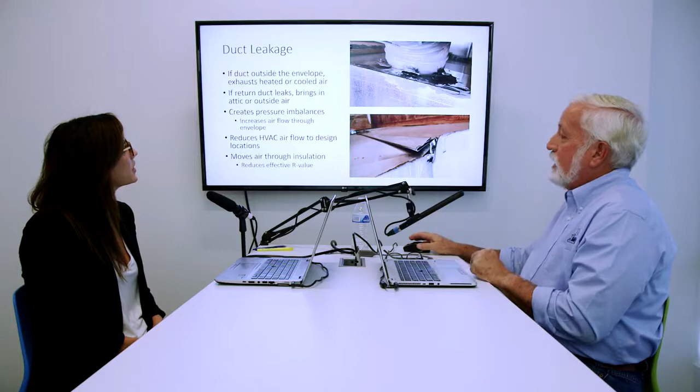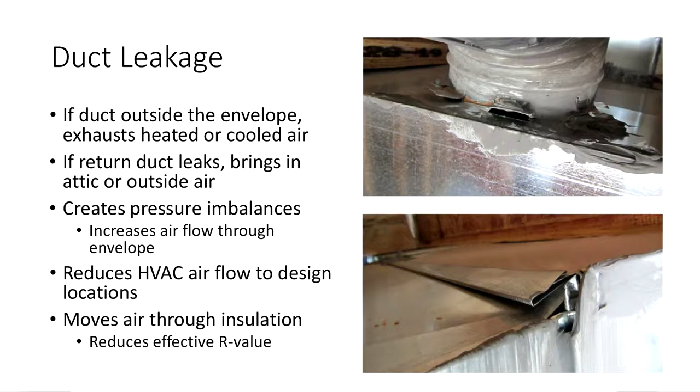Duct leakage: if ducts are outside the envelope, we exhaust heated or cooled air. So if we have a duct system in an attic and air is leaking through while the system's running, we have air that we just spent money to heat or cool blowing out into the attic. What's that going to do to our interior space? It's going to take it negative, because we just exhausted air with fan horsepower from our furnace. We're throwing air away, and it has to be replaced with air leaking in. So we create a negative condition.

If this was a return duct, drawing air back to the furnace, then it would be drawing in whatever hot air is in the attic in the summertime, back into our return system, and it's not going to work. It's adding heat to our system that we have to spend money to remove. In either case, whether it's a supply duct or a return duct leaking, we create a pressure imbalance, and it increases airflow through the thermal envelope.

So duct leakage increases the airflow through the thermal envelope, and it reduces airflow to the design location. This system had a design, and they wanted a certain amount of air delivered to a room. It's like a leaky garden hose - if you leak part of it before you get out to your sprinkler, you're not going to get it where you want it, you're going to get it someplace else. And we would like to have it where we want it. When we create those pressure differentials, we're moving air through the insulation, reducing the effective R-value.

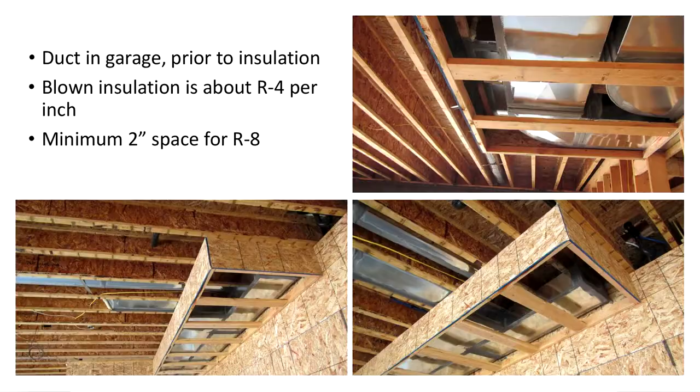So this next one, these are some great pictures, and I took these at the same time I took the other one, but this was in a different house. These are some pictures of ducts in a garage. This is that bonus room we talked about right at the first. This is in a garage. These ducts come up from the basement. This is the main floor. There's a second floor up above, all these ducts, and they're boxed around them all, and then they're going to insulate them.

Now the ducts require a certain amount of insulation, and these ducts are not insulated, obviously. They're just sheet metal ducts. There's no insulation on them.

Lots of times I see that someone comes in and they want to just insulate this with batt insulation. So they put a piece of fiberglass batt here and there. Every one of these, between the framing members, they put a piece of batt insulation, just a piece of blanket fitted in there.

And then they do the same thing up in the joist, and they pack it in around the ducts and wires there. But what it does, it leaves—so you put a piece of batt insulation here, then you have all this space up above that's just air. And you end up, when you think about it, maybe they put a piece up the side here, maybe not, but we end up with all these air spaces.

Well, what happens if you have air spaces and fiberglass insulation? We get air movement, the air moves through the insulation and it loses its value. The other thing we have to think about is if the ducts leak out there, they're outside—we're blowing the air into the garage. We're not keeping it in the house.

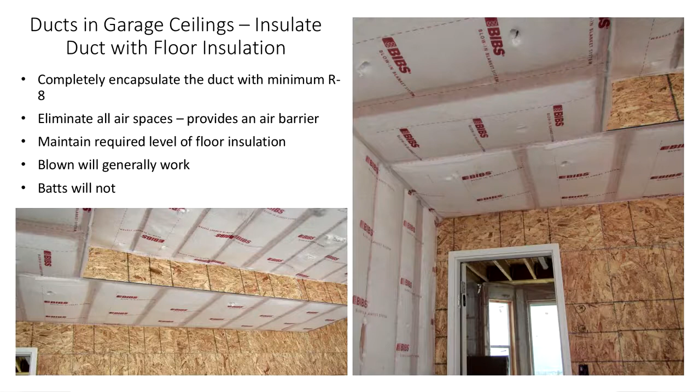Let's look at the next picture. Now this is a great system. This is what we call a BIBS system, blown-in blanket insulation. They literally come in—this is a house just like, if I go back, it looked kind of like this before. And they come in with this net, this fabric net, and they staple it over all those framing members, and you can see it kind of looks the same, doesn't it?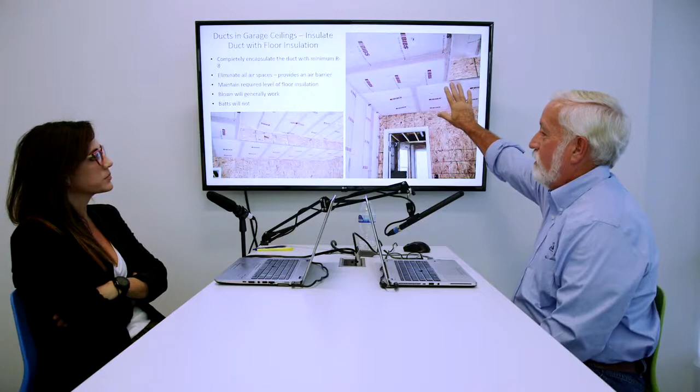Yeah, and then what do they do? They poke a hole in it, and they take a hose, and they just fill the entire cavity full of fiberglass. That stops the airflow. We have an air barrier on all sides of the insulation, because what's the air barrier going to be here? They're going to put drywall on it. So we have this insulation with that windbreaker on all sides of it. This is a great system. It works so well.

It stops the air movement. They put the drywall on and seal it well, and it really does a good job. Now this wall goes to inside the house. This is the wall that really probably should have had some Tyvek or something on it, because that's the wall between inside the house and the garage.

If you had your generator in there, or your grill. Now it's framed pretty well, and you can use the OSB for an air barrier if you tape or caulk all the seams, and caulk around these. This box they cut in fairly tight, so it's not going to leak very much. And if they drywall it and then seal it, the drywall can be an air barrier too, as long as you seal it. We'll talk more about that a little later.

This isn't a perfect house, but they've done a lot of things right, and this is one of the big things that really makes a big difference. I'm sure one of the reasons they started doing this is because they had complaints of comfort in the bonus room. So by doing this, they made sure they had a good insulation package on the floor system, and they're stopping airflow too. We don't have that airflow moving around within it.

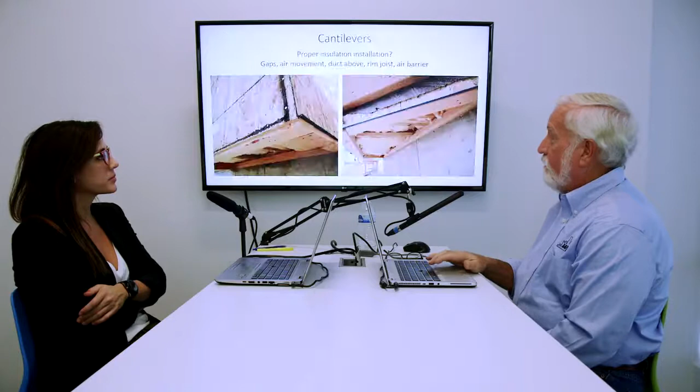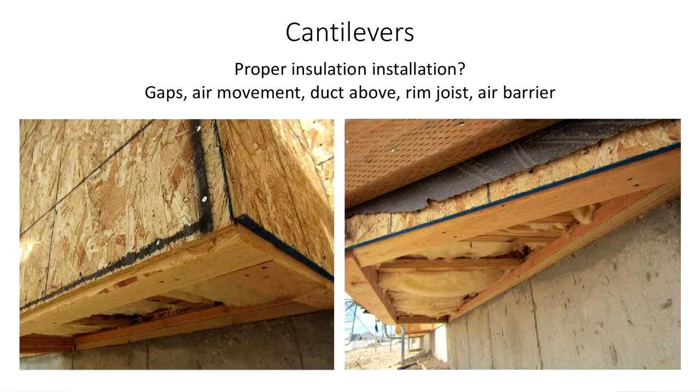Okay, remember we pointed out earlier in that one early slide the cantilever where the fireplace stuck out? So I'm going to define a cantilever right now, because there'll be people who aren't completely sure what a cantilever is, and I have other slides we need to talk about on this. It's an overhang, right? It's an overhang, yeah.

What they do is these are self-supported, because see, this is a joist, and there's a double joist, and the joist runs all the way in. So there's a joist sitting here with just a little bit of overhang, but they go way back in. Because of the length inside, you're fine. It's not like it's going to topple over or anything like that, because it's self-supporting. There's structural requirements on how much has to be inside for how much you have overhanging.

Yes, and so little two-foot overhangs are great. This one's a bay window, that one's a fireplace. But I brought this up because, again, we're looking at the insulation. Now this is the same homes where they're blowing insulation in the garages. So if they were to blow insulation in here, they would net the bottom off, and then blow insulation in. What they've done here is they've just shoved some batts in.

What's real critical is they at least have to put something on the bottom that air seals it, and oftentimes they don't. In fact, in my house right now, it was an existing house when we bought it, and we have a bay window like this. When I first moved in, we moved in August, and in October we had a cold day, and I walked down in bare feet across the hardwood floor, and it was really cold, because the wind was blowing right up into that cantilever.

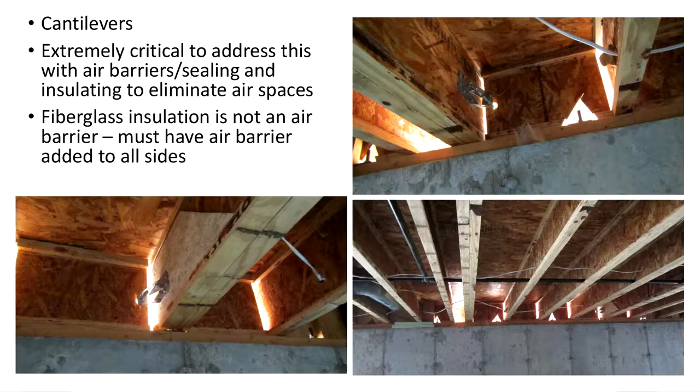And some of these pictures are ones that weren't insulated on the outside yet, but they are going out into the cantilever, and the next one we do have insulation.

But it's extremely critical on these cantilevers to address the air barrier and the sealing, because you can see right here what's happening because of the cantilever. You see the little notch here? These notches are for the bolts that hold the house, this sill plate down to the foundation.

And there's a notch there for the bolt, but what's on the outside? The plywood comes down over it. If we back up, that picture doesn't show it very good, but see, the plywood comes down the face here, and when we get over here, the plywood keeps running, and it's covered those holes. But because of this cantilever, those little notches for the bolts, we aren't covering them on the outside. They're up inside this thing.

So you can see where the cantilever starts right here and then goes over to about here. And that's a bay window, and then you don't see the light anymore. So all these spaces are spaces that air can move through. And if we don't have a good seal on the bottom, then the wind comes up and it goes through all those spaces. Now they insulate this plan by putting a blanket on the walls, and so the basement is conditioned. The thermal envelope goes all the way down.

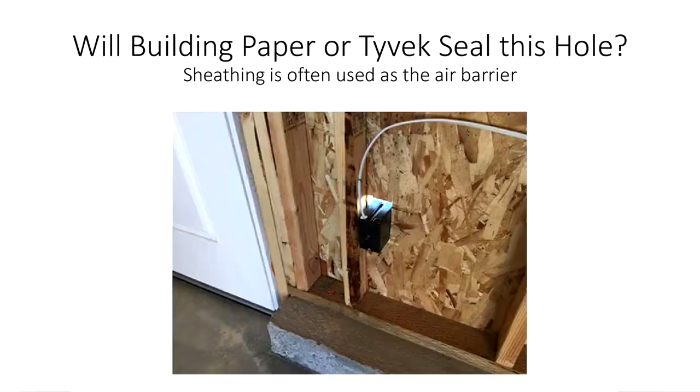Here's the electrical box, they've cut the hole bigger than they need to. Will building paper or Tyvek seal the hole? Sometimes sheathing's used as the air barrier, and we need to seal that.

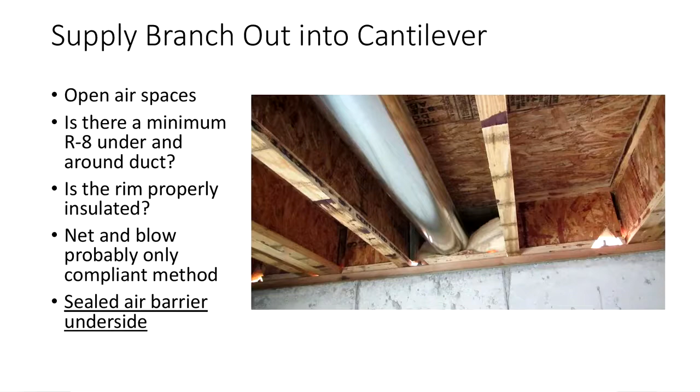So let's go back to the one that, I probably should move this slide. This is the one that we looked at before, that we had insulation up on the underside of the cantilever. And they've shoved a piece of insulation in there, you can see a little bit here, right? But we still have a void above, we have a gap above.

So insulation just comes part way up. We have a piece of duct laying on it, and we have an airspace over the top. Well, the rim joist out there is not insulated. This is really, I'm fascinated, a poor installation.

If they had put the net on the bottom, and maybe they would need to foam these a little bit or something, or put something to block it, or even put a piece of net over it, and then the loose blown insulation in there, we would have a much, much better insulation installation in that spot. And we would be stopping the air moving above the insulation, because obviously we're going to have a lot of air movement above that insulation.

Where is the thermal envelope in this house? The thermal envelope then goes down the outside of the wall, around the outside of the cantilever, comes back in under the cantilever, and then because they're blanketing the walls here, it comes down to the basement floor. Now, when we get over here to the side, they're not spraying foam in the rim joists, they're just putting a piece of fiberglass batt.

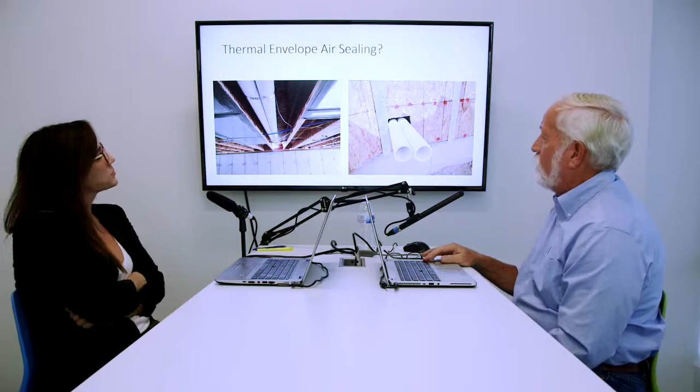Here's a better view that kind of explains some of those things I was trying to describe before. This is a different house, but we have the same condition. We can see a bay starting right here.

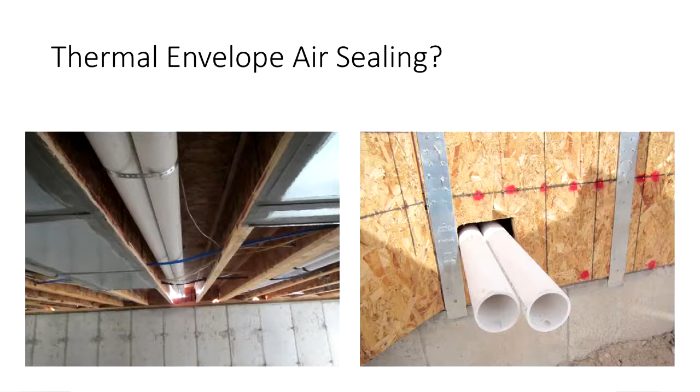Just to the left of these pipes from this side, if you walk around to the outside, the bay runs - the right side is the left side from outside - and you can see where the holes are there for that cantilever.

There's an overcut hole there. If they don't seal that properly, we're going to have air movement through there. And you can see the little notches for the foundation bolts where the light's coming through, because this OSB comes down where we don't have a cantilever - those get covered or sealed from this plywood.

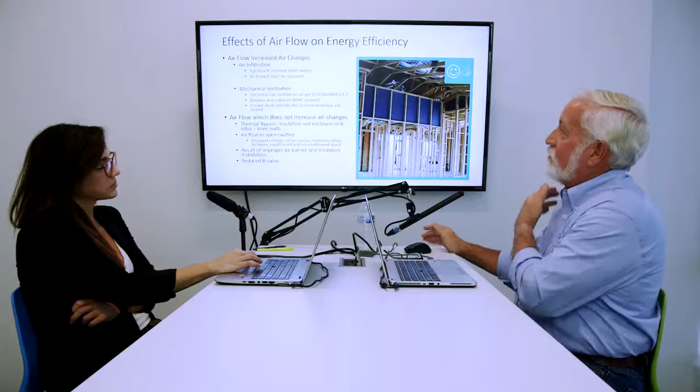Okay, the effects of airflow on energy efficiency. So we've been talking about how it's going to impact the airflow inside and outside the building. Now let's talk a little bit about the effect on energy efficiency, and we've touched a little bit on it.

Obviously airflow increases air changes. The more airflow we have through our envelope, the more holes we have in it, the more air changes we're going to have every hour in our house. If our house is really leaky, then we might have an air change every hour - we leak all the air out of the house every hour, or every 2 hours, or every 3 hours. We want to get it down to where it's much less than that - we don't want to leak all the air in the house, but every 6 or 7 or even 10 or 12 hours.

We don't want to leak that much air. Air infiltration, of course, increases with wind, and any air that leaks must be replaced. So if we have a lot of air leakage, we're going to have a higher utility expense simply because we're having to reheat air that we had to bring in, or cool hot air that we had to bring in.

Mechanical ventilation, if we properly size it - people say, well, if I'm having to reheat air for infiltration and ventilation, it's the same thing. Well, proper ventilation on a 3-bedroom house only requires like 60 to 70 CFM. It's not a lot of air, but we're bringing it in, we're getting rid of contaminants at the sources, whether it's in the bathroom or the kitchen, and we're maintaining it all the time.

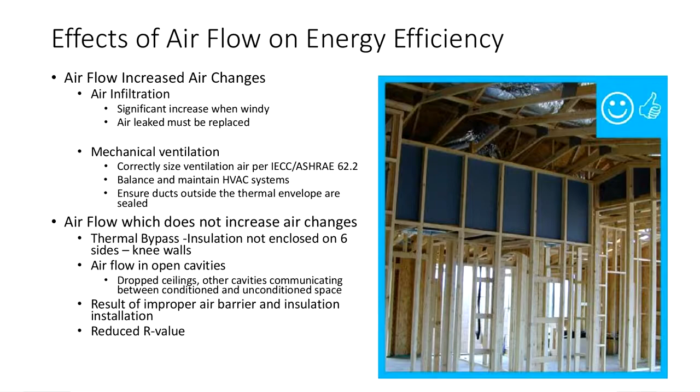And so it doesn't cost as much, because we might leak 5 or 10 or 20 times as much through infiltration as we bring in through ventilation. And we have, guess what? We have building science that gives us direction on how to properly size those. We need to balance and maintain our HVAC system, and ensure ducts that are outside the envelope are sealed.

But we also have to think about airflow which doesn't increase air changes, but increases our energy cost. Remember when we talked at the first about the knee wall, the little short wall? If we don't have something on the backside, the air is just going to flow through. We're not leaking air in and out of the building through that, but we're losing energy because the insulation has air moving through it.

So here's a case where someone's prepared for that. We have a higher ceiling in this area, and on the other side of this blue board is attic space. Okay, you got that? So what they've done is they've come in and put that blue board on the backside. They will insulate it.

And they can do batts or blow-in insulation. But once you insulate it and then you drywall this side, what happens to the insulation in there? It's enclosed on 6 sides - we've got a block there, we have a block on top, we have the stud on that side, we have the blue board on the back, and we have the drywall on the front.

And so what happens with that insulation? We have no air moving through it, so we have the full effect of the R-value. It resists the flow of heat through there - the insulation can do its job.

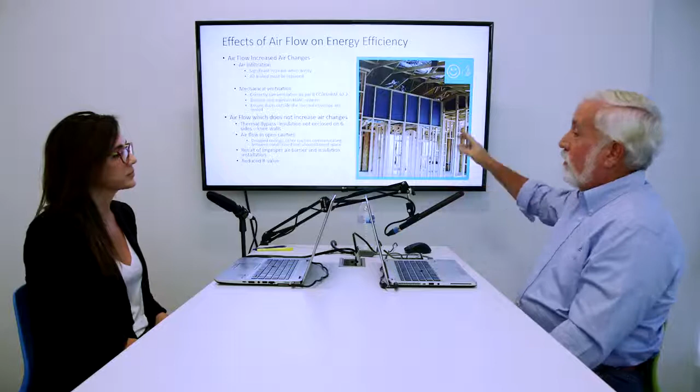If we don't have the blue board and they just shove up the fiberglass, then we're going to have this convective flow - we're not moving air through it, we're moving it through the insulation, and we're increasing our utility expense, our energy consumption. So any place that we have drop ceilings or anything that creates an open cavity, we need to seal it up, otherwise we're going to have reduced R-value.